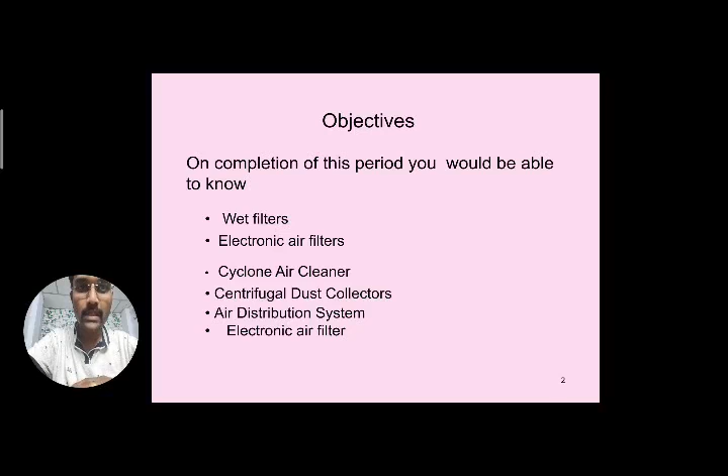Let's move into wet filters now. Here you can observe the diagram of the wet air filter. Just observe it for a moment and you can understand it's very simple. If you know the diagram and how the process happens, you can see this line diagram and understand very easily what is happening in this case.

So let's see what components are there in this wet air filter. Its name itself indicates we are using some liquid or water to make it function as a wet filter.

You can see one side of the passage where the dirty air, containing dust particles, enters, and at the exit you can see the eliminators are provided. Before the air passes onto the cooling coils, the clean air passes over the cooling coils or evaporator coils.

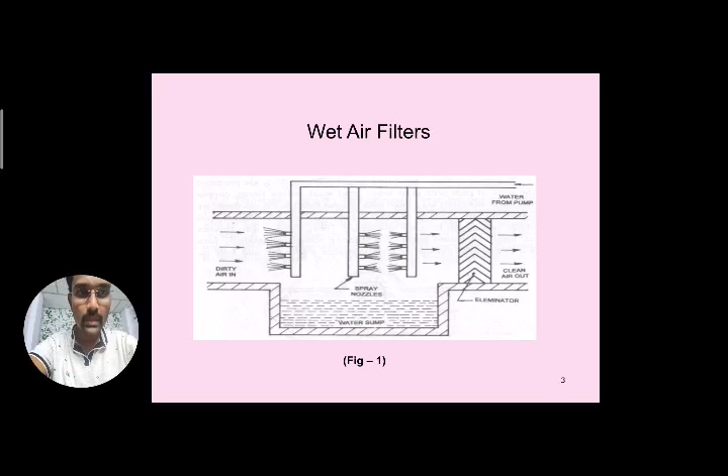Between these two passages, you can see water coming from a pump through different pipelines, connected to spray nozzles where water is sprayed. This makes contact with the dirty air containing dust. The water sump is placed at the bottom, so all the dust along with the water particles collects at the bottom in the water sump. Now let's see a few lines explaining wet air filters.

It absorbs the soluble gases present in air. In the previous cases, dry filters and viscous filters, removal of dust particles and gases present in the air did not happen simultaneously. But in this wet air filter, simultaneous action on both happens - removal of dirt as well as gases present in the air - so both can be eliminated in this wet air filter. Mostly it absorbs the soluble gases present in the air.

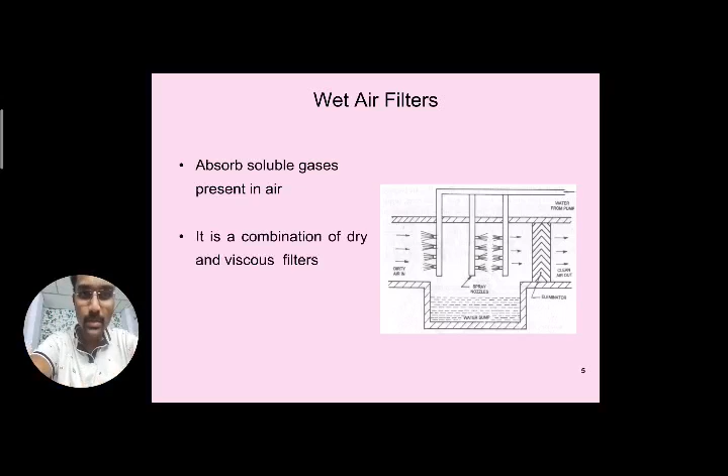As already told, it is a combination of dry and viscous filters, used to remove dust and gases. Both these things can be removed, and these are much more useful than the dry filter and viscous filter, because the combination effect is achieved by these wet air filters.

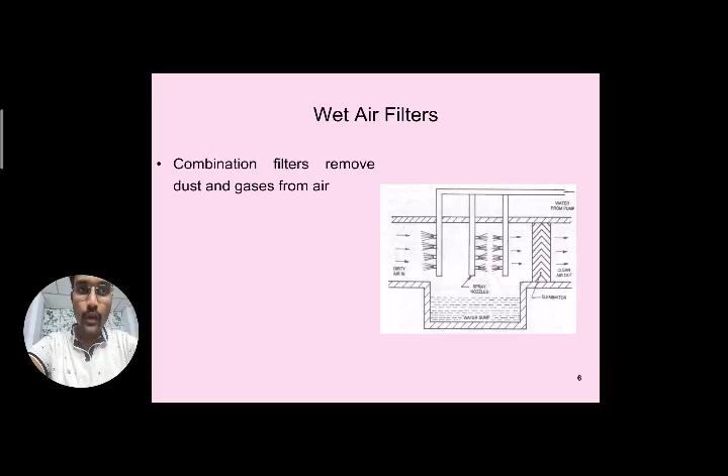The combination filters remove the dust and gases from air. The air is made wet by water spray. As already told, whatever dirt along with the air comes here makes contact with the water, and when the dust particles mix with the water, it gains more weight.

Additional weight is added along with the water and the dust particles. They gain more weight, and they fall down in the water sump, which is provided at the bottom. So due to its additional weight gained by the dust particles along with the water, it will come and fall in the water sump.

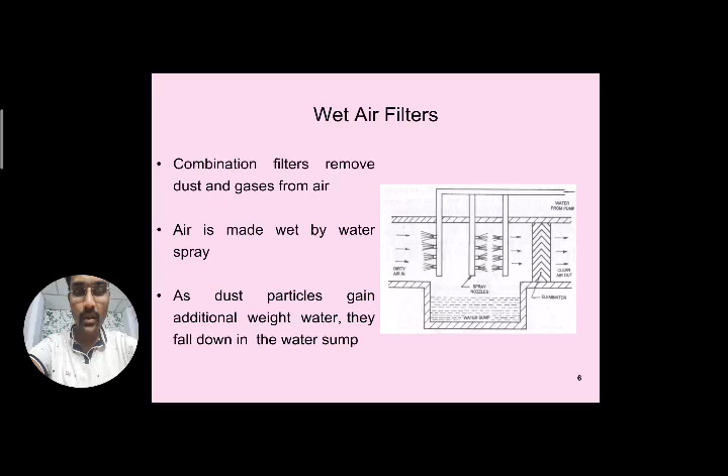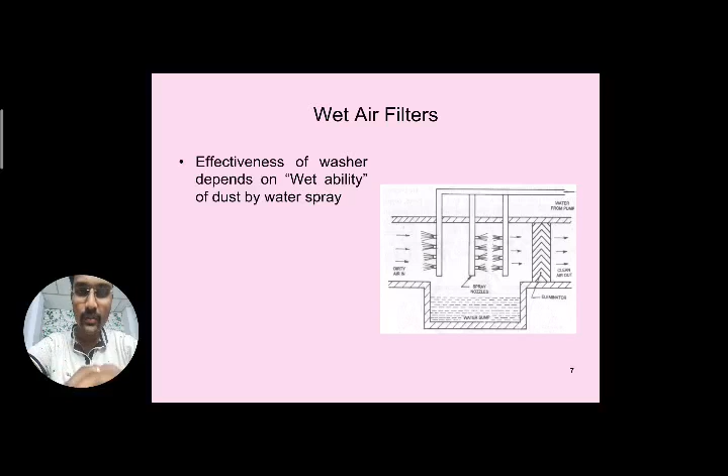The effectiveness of the washer depends on the wet ability of dust by water spray. So here also one criteria: whatever the dust particles coming along with that air, it has to absorb the water, and due to its absorbency, it will readily absorb the water and collect at the bottom. If they are not having the wet ability, it means if they are not absorbing the water content, it is a waste of using these wet air filters.

It may be efficient or may not be efficient for that particular type of dust particle. If they are present in more quantity and not absorbing the wet nature, it is a waste of using these wet air filters. But effectively it will work under all conditions, mostly used in the industrial area where dust, gases or smoke is present. So that is regarding the wet type of air filter.

And there's a more advanced air filter, mostly used in industries where bigger or larger appliances are there. We can use this type of air filter, the electronic air filter, where a lot of the dust particles can be removed by this electronic air filter.

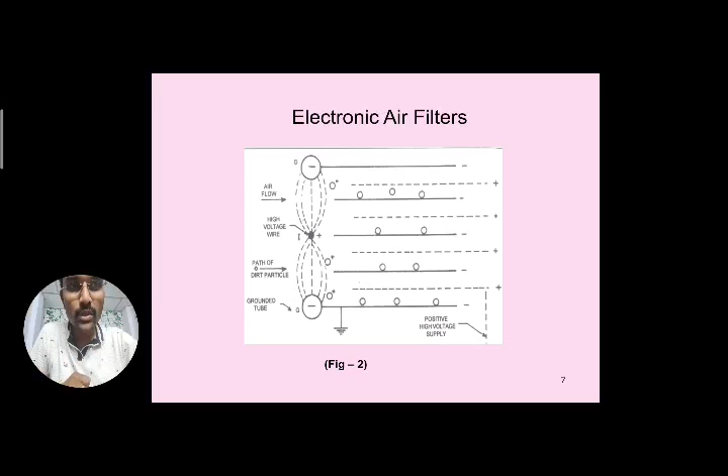So airflow will take place from the left side. Let us observe what is happening in this electronic air filter. It is also known as the electrostatic air filter.

It's called electrostatic because it works on the principle of electrostatics, where the static nature of electricity can be seen in this system. The negatively charged dust particles are readily absorbed by the positively charged plate, since unlike charges attract each other.

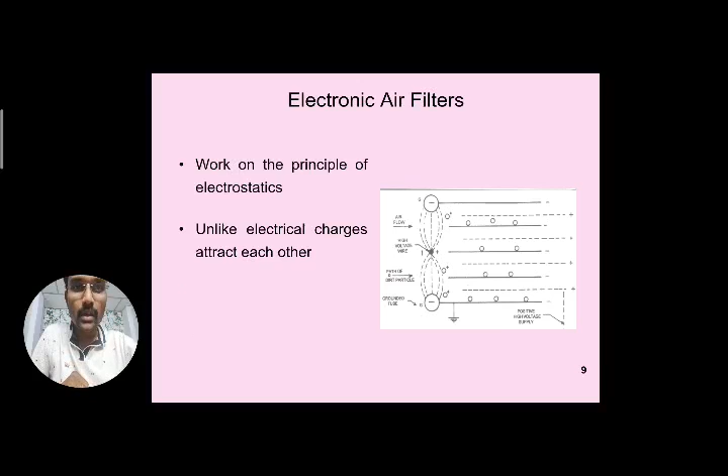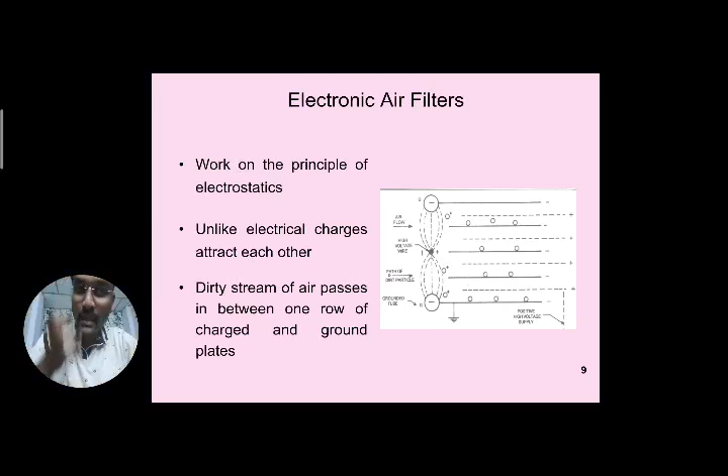Now the dirty stream of air passes in between one row of charged plates and ground plates. So there's a charged row and a ground plate, and whenever the dirty stream of air passes in between them, it will be attracted towards the positively charged plate.

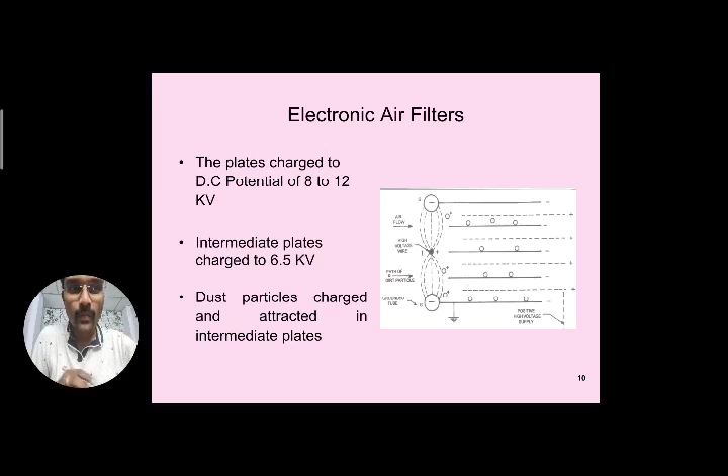Now the plates are charged to a DC potential of 8 to 12 kilovolts. The intermediate plates present in between them are charged to 6.5 kilovolts. So dust particles get charged and are attracted to the intermediate plates, shown here, readily absorbing once charged and attracted to that unlike charged body.

These filters are most efficient in larger installations. The collector plates of the filter are coated with oil to catch dust particles. So besides attracting the charged particles readily to the intermediate plates, they are also provided with oil to catch the dust particles readily. These plates are periodically cleaned due to the attraction and buildup of dust particles after some usage.

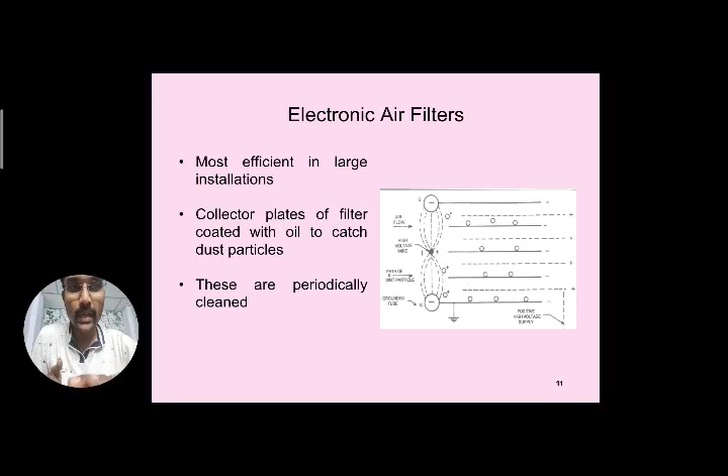A dirt film will form on those plates, so they can be periodically cleaned after usage. So this is regarding the electrostatic air filter, a very important topic. It's also called the electronic air filter, mostly used at industrial sites where bigger appliances are installed.

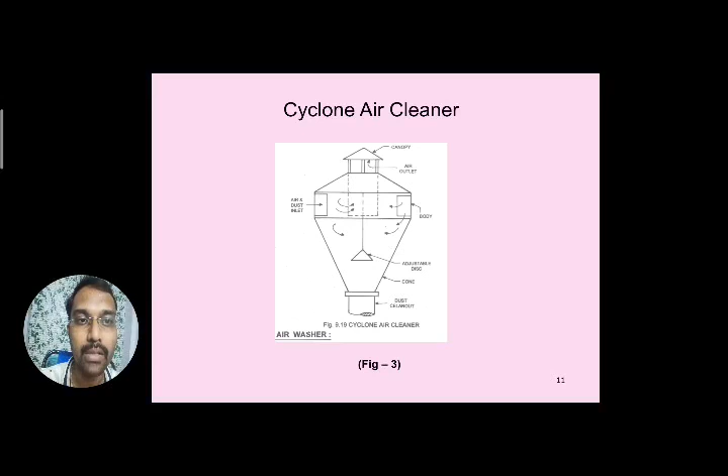You can see some cyclone type movement in this air cleaner, where the air and dust inlet is at the sides, around the complete body. The outlet is at the top - there is a canopy at the top where air outlets are provided, with gaps in between through which the air outlet takes place. At the center you can see an adjustable disc hanging, and a cone type structure, where the dust collected can be cleaned out through the bottom of that section. Let's see a few sentences regarding that.

These type of cyclone air cleaners are also used on the industrial side. It is an industrial air cleaner and removes large particles. Mostly when the requirement is to remove very dirty air, or when the air contains more sand or dust particles, we can employ this type of cyclone air cleaner.

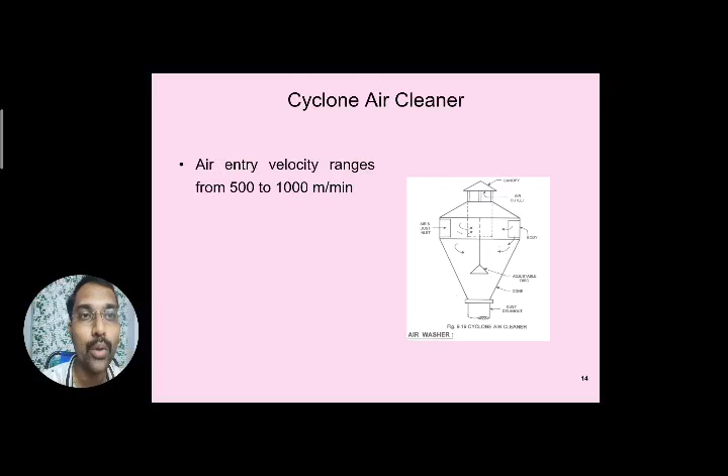Dirty air enters the body tangentially - you can see where it enters at the top, it enters tangentially into that chamber. The air entry velocity generally ranges from 500 to 1000 meters per minute. This is a requirement for employing these cyclone air cleaners - remember this point, the velocity ranges from 500 to 1000 meters per minute.

Due to centrifugal force and the reversal of direction of airflow - that means due to this rotational force and reversal of direction of airflow - as it escapes from the unit, it affects the removal of airborne dry solids.

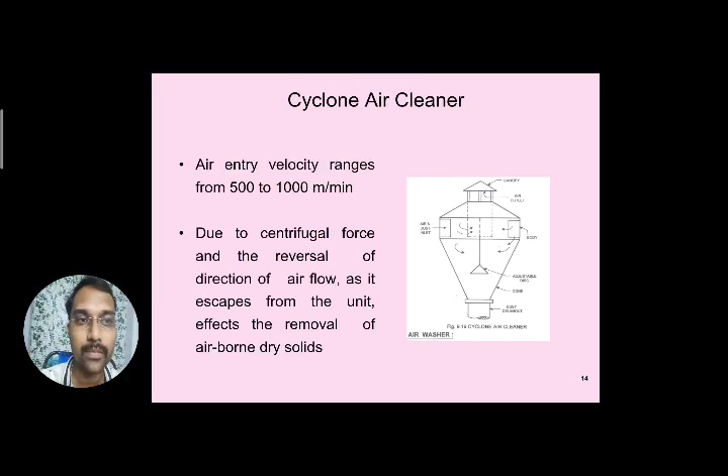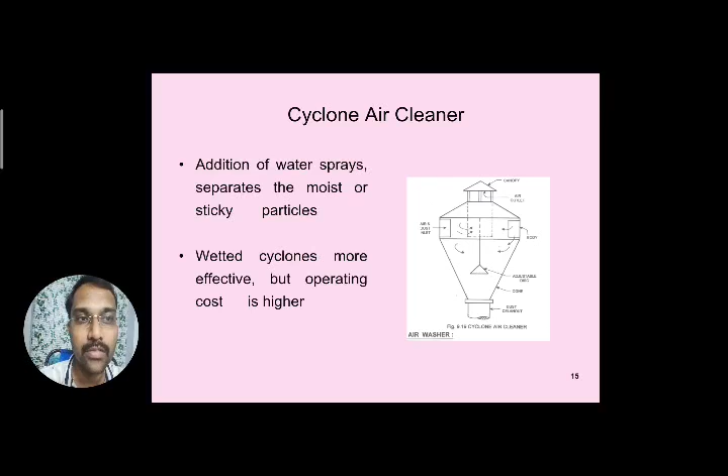Addition of water sprays separates the moisture and sticky particles. To avoid the escaping of dust particles, spray water can be additionally provided here, where it separates the sticky particles and similar contaminants. But wetted cyclones, while more effective, have higher operating costs compared to normal cyclone air cleaners.

So this is regarding the air washer - the next topic. You can see here the two passages where filtering takes place, with eliminators provided. Air inlet and air outlet are provided, and eliminators are provided for additional functioning of that air washer.

Whenever only pure air has to be sent outside, it contains some moisture content due to the addition of water particles. That water has to be removed with the help of these eliminators. At the bottom there is a pump, a heater, and makeup water provided into the tank. Water is sprayed continuously from the top, and due to the contact with air, a process of evaporation may take place at some time.

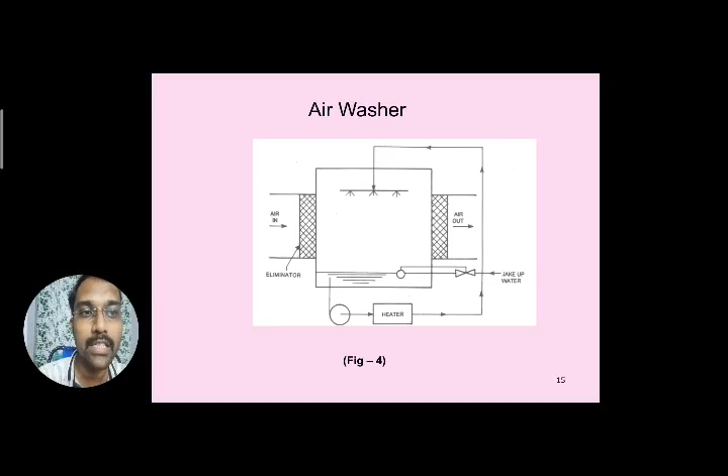Due to that, additional makeup water is added here. And if you observe, this air washer will also be used as an air cleaner. So why are you studying this topic? It serves as an air cleaner, and it acts as a humidifier or dehumidifier based on the condition.

The requirement depends on the season. If humidified air is required, addition of moisture will take place here. You can see a heater is provided, depending on the season condition. Dehumidifier is also placed here.

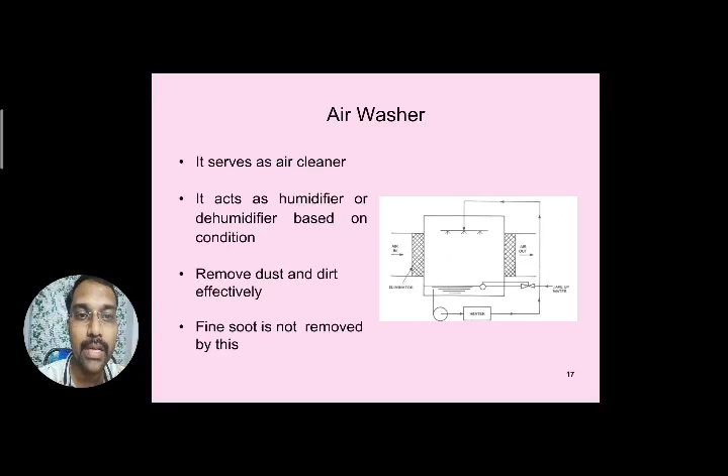It removes dust and dirt particles effectively, because the water particles make contact with them, so the dust particles absorb the water content and fall down due to their heavy weight, and only fresh air can be sent outside through the eliminators. However, in this type of arrangement, very fine micron particles of soot cannot be removed in these air washers. There is a chance of very fine soot particles escaping.

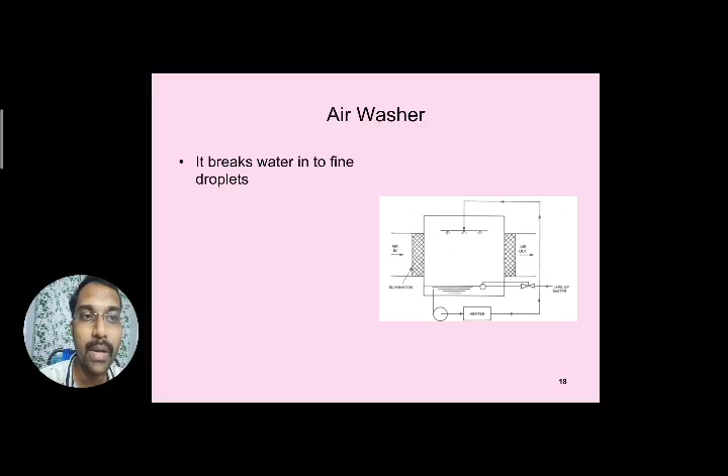What happens here is the spray headers break the water into fine particles, and the combination of wetted surfaces and water discharged from the spray nozzles work together. You can observe there will be wetted surfaces around the wall, and water discharging through the spray headers. Both combinedly act on the dust particles to effectively remove them from the air.

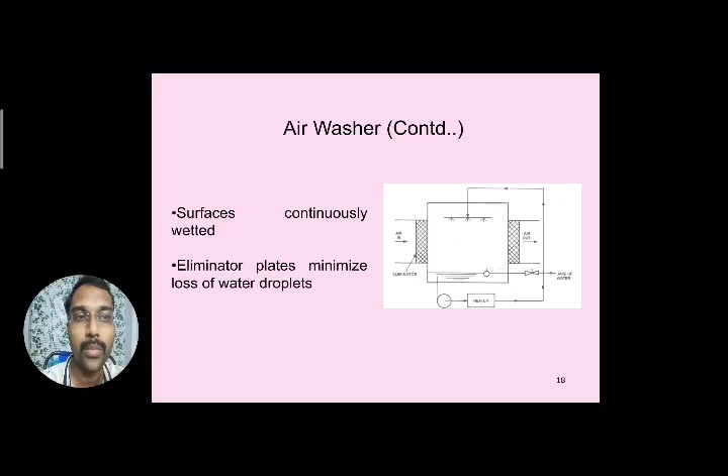The surfaces are continuously wetted here, so whatever passes through also gets continuously wetted. Eliminator plates minimize the loss of water droplets. As I already told you, it contains some water droplets and water vapors, which have to be removed, and only the air has to be sent outside through that passage.

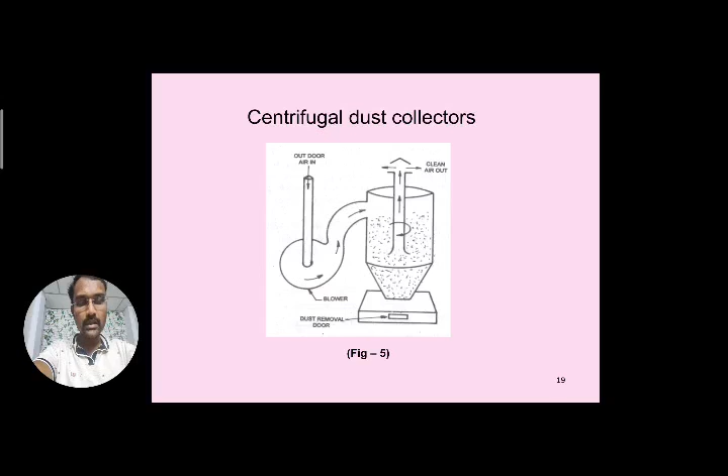Due to the blower, a whirling motion takes place in the conical section, causing it to revolve. Due to that rotation and whirling motion, dust particles collect at the sides of the dust collector. Only the fresh or clean air passes through the tubes and is sent through other passages, and dust removal takes place at the bottom portion.

We'll see a few lines regarding this centrifugal dust collector. They are most popular in industrial applications and effectively remove large dust particles.

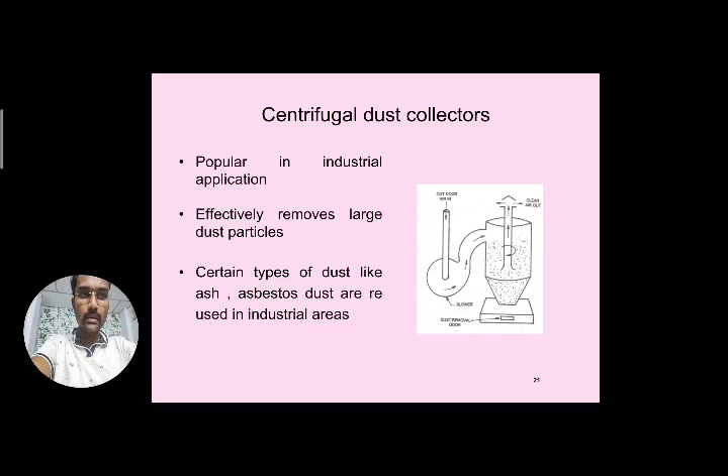If you want to remove large dust particles at industry sites, centrifugal dust collectors may be the most popularly used. Certain types of dust, like ash or asbestos dust reused in industrial areas, can also be removed in these centrifugal dust collectors. So they are used in industrial applications.

So explaining this, the air stream passes into the conical chamber. You can see there is a pipeline where outdoor air from the atmosphere enters into this conical chamber by blower.

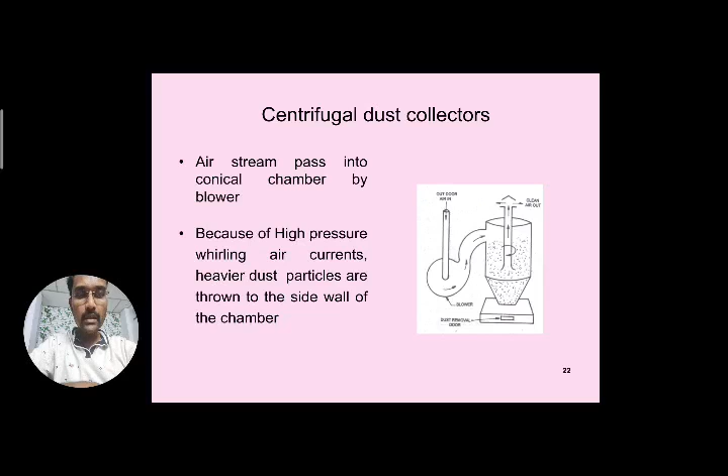First, air enters with the help of a blower and is sent to the conical chamber. Because of the high pressure whirling air currents created by the blower, heavier dust particles are thrown to the sides of the chamber.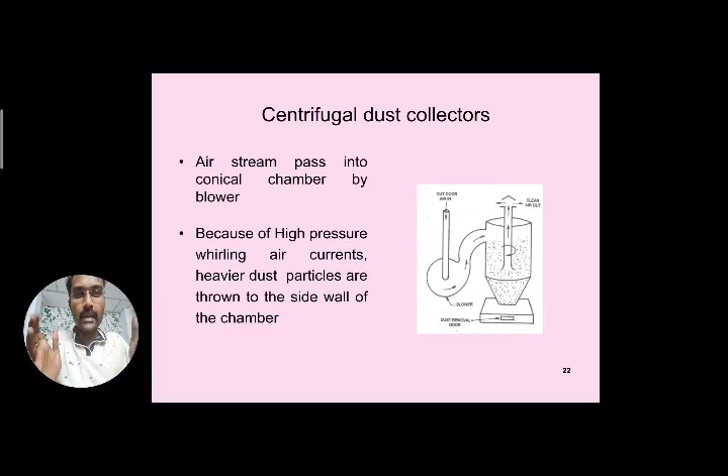Heavy particles settle at the sides of the wall of the chamber. This is how it is done in the centrifugal dust collector. The dust collects at the bottom of the cleaner, while the clean and dust-free air goes out from the top of the cleaner.

The dust is collected at the bottom of the cleaner after settling down, after losing its whirling motion. The clean, dust-free air moves through the center toward the top, and is again used as clean air, which is sent further to the cooling coil or evaporator coil.

However, it is not able to remove minute dust particles. It can only remove very large particles like ash or some asbestos particles. The very minute particles present cannot be removed in this centrifugal dust collector.

However it may be, it is doing its function and may be used in industrial applications for a very effective purpose. To operate the blower and create that much high pressure, and to remove very large dust particles, it requires a very large amount of power. The cost of the equipment may also increase, but they may still be used in these industrial applications.

So this is regarding the centrifugal dust collector. Next, moving on to the next topic. Hope you have understood these air cleaners and dust collectors. The next topic is regarding the air distribution system.

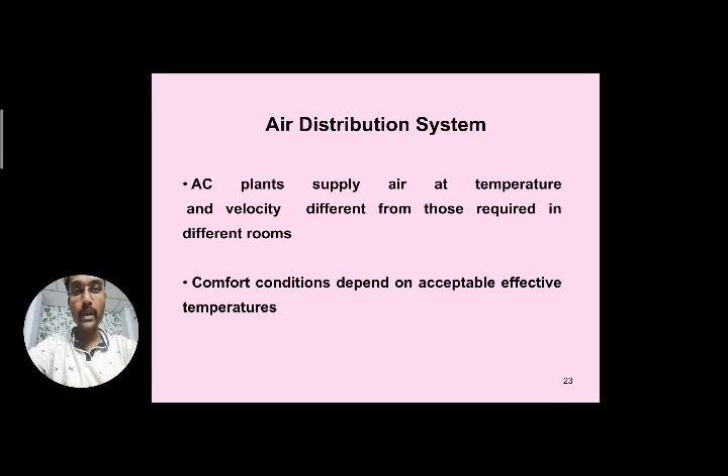As we have seen, the effective temperature depends on different factors like dry bulb temperature, wet bulb temperature, and relative humidity. Depending on all these conditions, the comfort conditions will depend.

Next, good air distribution is also one main factor, which is achieved by the proper temperature, humidity, and air motion in the conditioned space. All these factors will additionally support good air distribution.

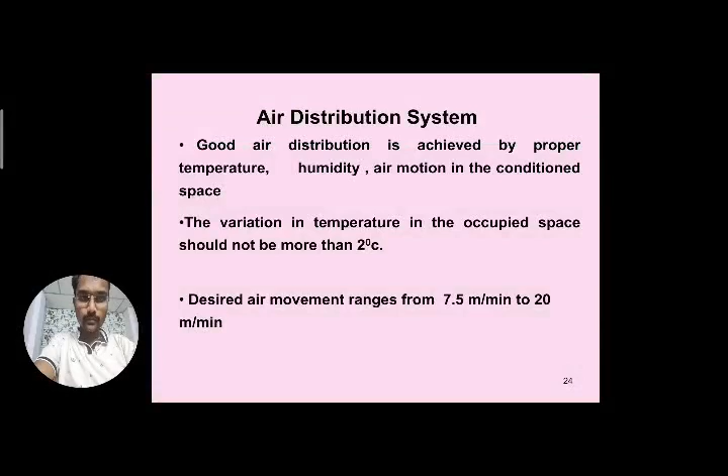The variation in temperature in the occupied space should not be more than 2 degrees centigrade. If the air distribution is uneven, there may be changes in temperature which affect the change in temperature. The desired air movement ranges from 7.5 meters per minute to 20 meters per minute.

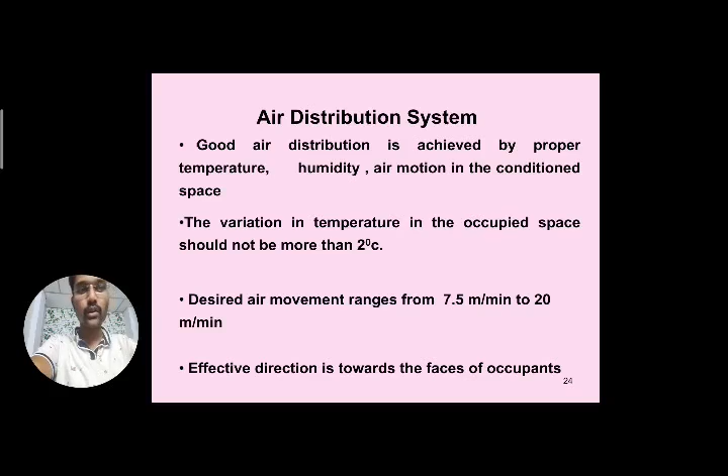The effective direction is towards the faces of the occupants. Mostly, wherever the occupants' faces are, the direction may be that way. Whatever the sitting direction is, the occupants' face direction should be the effective direction where the air distribution has to take place.

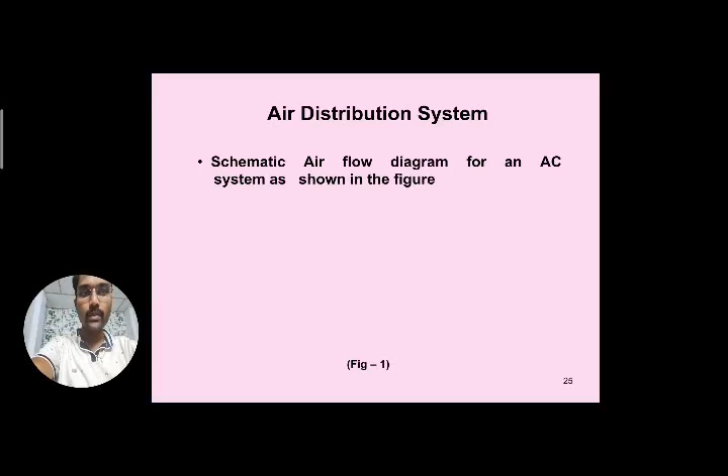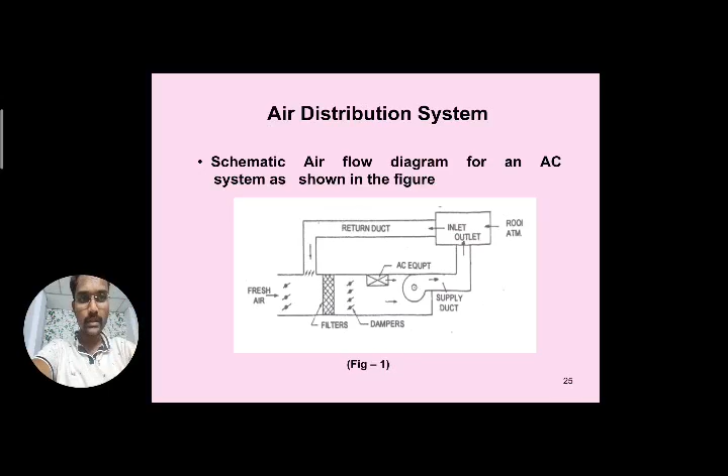Next, the downward airflow is better than the upward airflow. The mostly chosen and more comfortable option is when the airflow coming into the conditioned space is a downward airflow, which is much better than upward airflow.

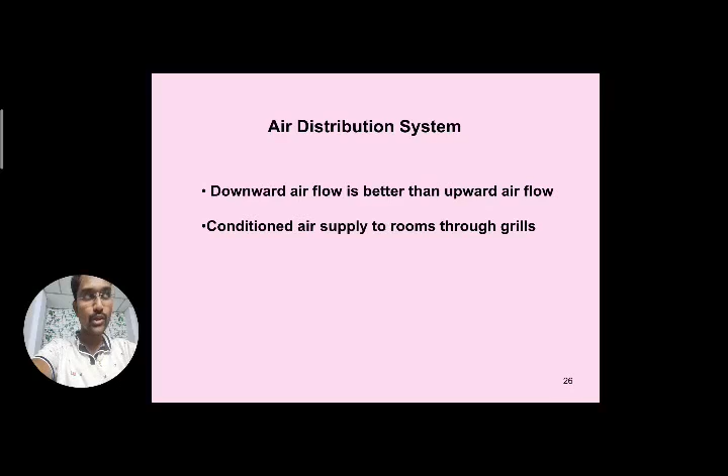Now what about the conditioned air? It's supplied to the rooms through grills. So grills are provided, and from that the conditioned air is supplied to the rooms.

Coming to the classification of air distribution systems: several methods of air distribution systems are used for different purposes. Different air distribution systems are utilized here, and we will see some of them. Just to list them out, the main three are the ejector system, the downward system, and the upward system.

In today's class we will learn regarding the ejector type of air distribution system. We will see its subtypes and discuss what the ejector air distribution system is, starting from the ejector system itself.

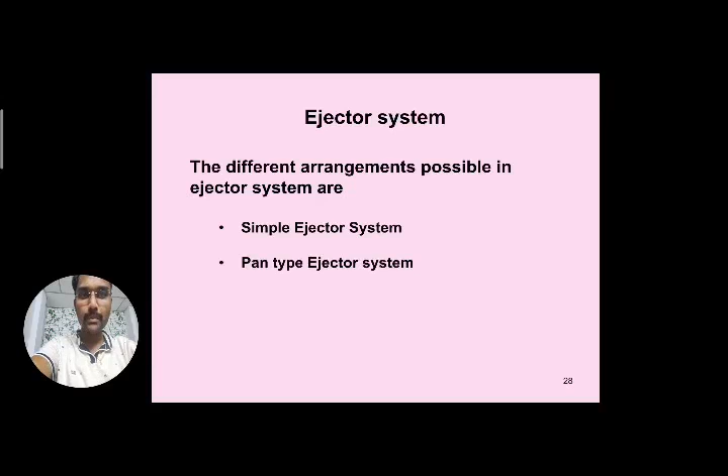In the ejector system, different arrangements can be made. One is a simple ejector system, pan type ejector system, combined pan ejector for supply of return air, and comfort draft system. These are the four different arrangements of the ejector system.

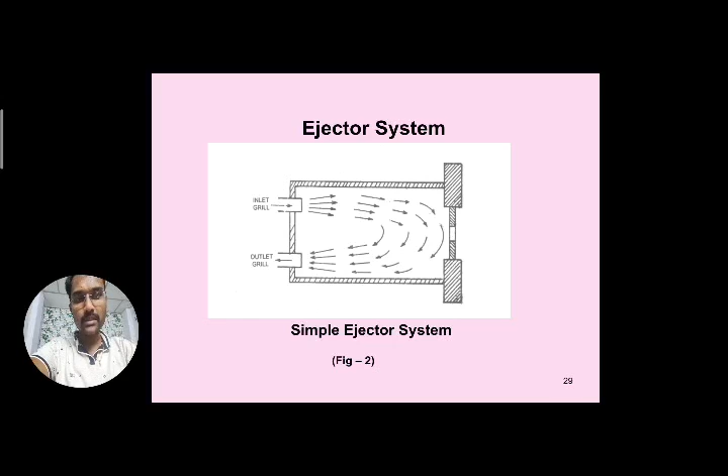Air is entering, and the return air has to go through the outlet grills, then enter into the return ducts. On the same wall, grill attachments are provided - inlet and outlet grills. The air is conditioned, passed or ejected into the conditioned space, then sent back by changing its direction to the outlet grill.

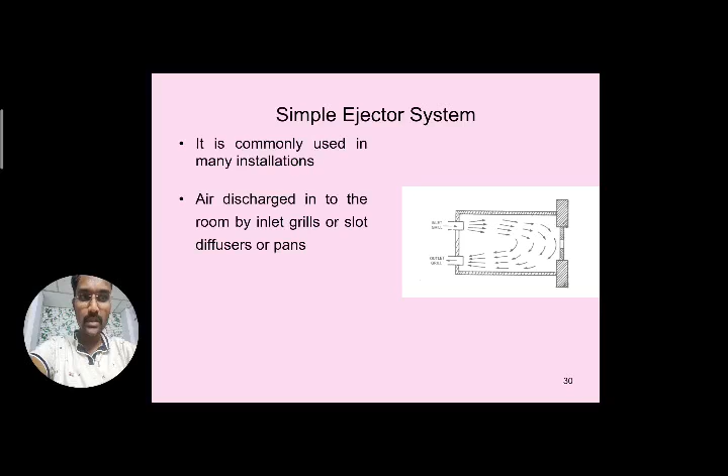Let us see some points regarding that. The simple ejector system is commonly used in many installations. Air is discharged into the room by inlet grills, slot diffusers, or pans, which are provided at the entry of the wall. It is cheap and simple in construction.

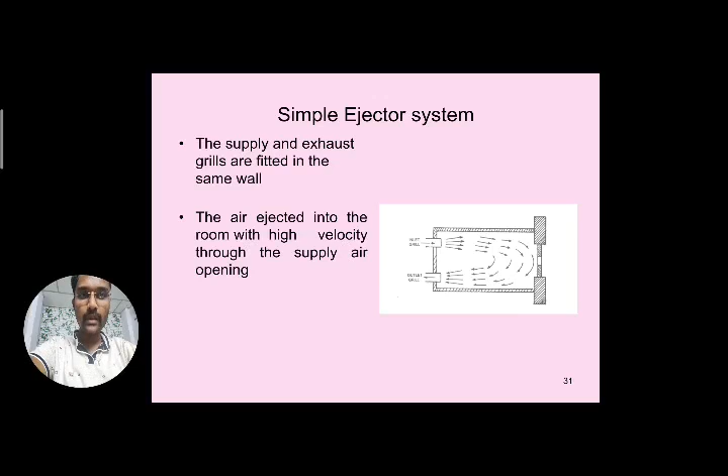The supply and exhaust grills are fitted in the same wall, and the air is ejected into the room with high velocity through the supply air opening - that is the supply air opening into the room.

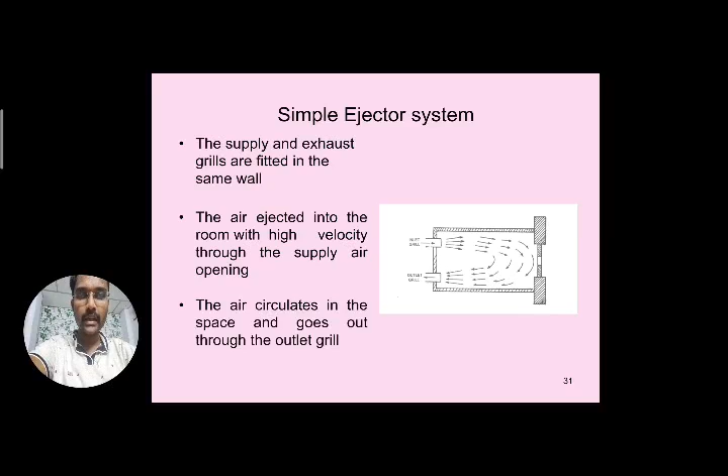The air circulates in the space, and the circulated or used air goes out through the outlet grill provided, so that will enter back. Very simple in design. Now looking at the second type - the pan type structure, this is the plate pan type ejector system.

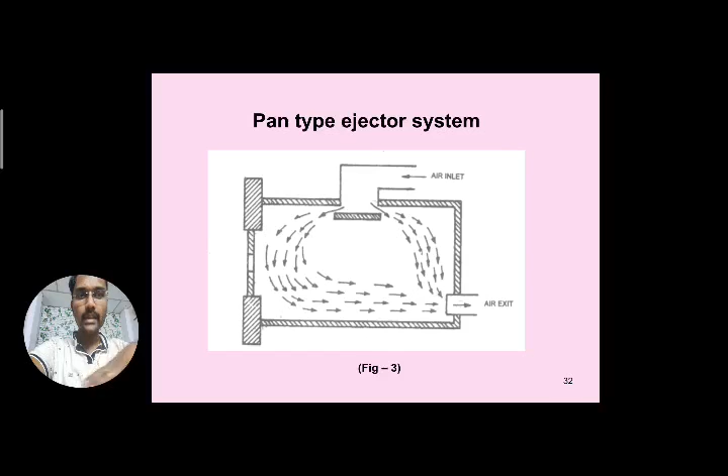It is relatively better for uniform distribution of air compared with the previous simple ejector system. So it is somewhat better for uniformly distributing air within the room. It is an improved method of air circulation. You can see this in the diagram.

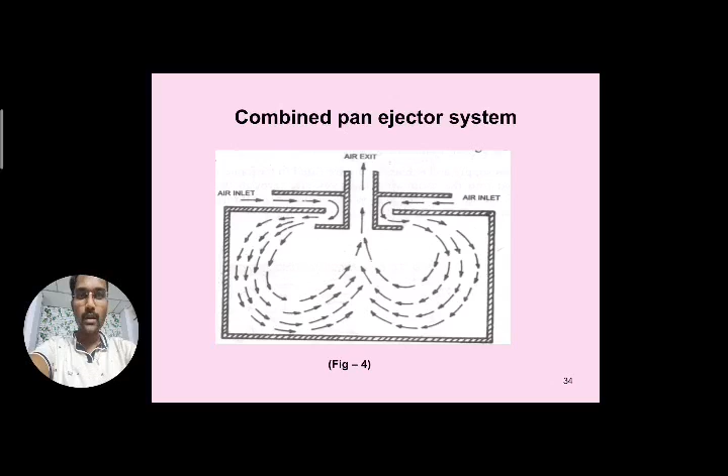Next, for the same pan ejector system, there is an advanced type. It is a combined system where air inlet takes place, giving complete distribution throughout the room uniformly. This is an advancement of the pan ejector system. You can observe the diagram here.

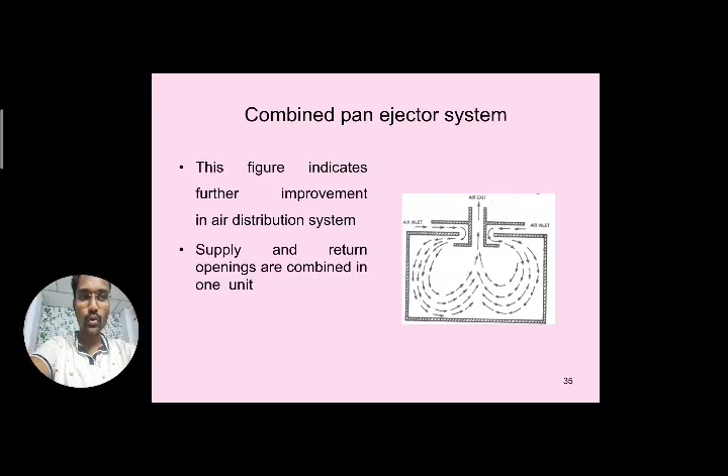Further improvement in the air distribution system is taking place in this combined pan ejector system. The supply and return openings are combined in one unit. Supply air exits at the center, moving upwards, and inlets take place at the two sides combinedly. So it makes contact throughout the room, and air exits again from the top. In one unit, you can see both the inlet and outlet systems.

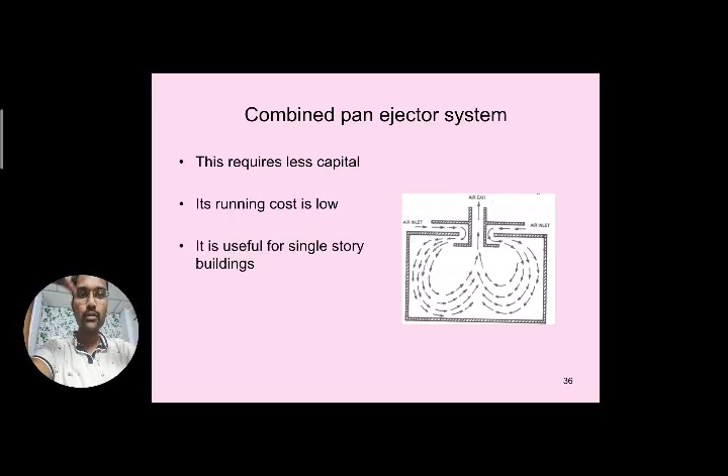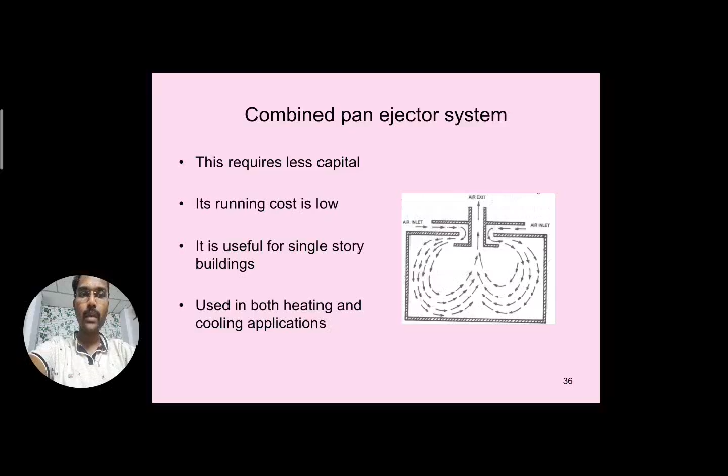This requires less capital, meaning investment is very low for this combined pan ejector system. The running cost is also very low. It is used for single story buildings, where it is very best suited. This combined pan ejector system is used for both HVAC - heating, ventilation, and air conditioning. So this type of combined pan ejector system is used. This is the third system.

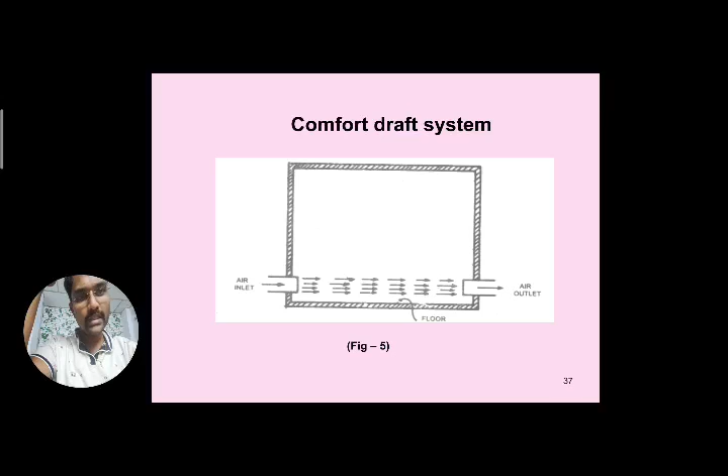Moving to the next system, the comfort draft system, which is very simple in design. At the bottom level of the floor, the air inlet and air outlet are placed at the same level, up to a height of about 2 to 2.5 or 3 meters from the floor level, where these passages are provided for air inlet and air outlet.

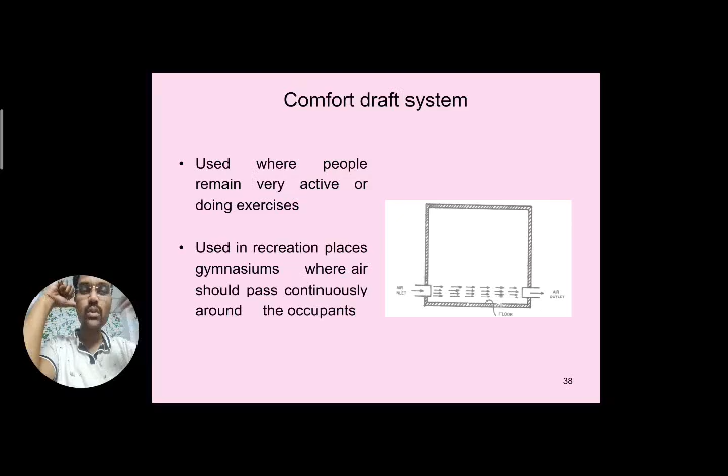This type of air distribution is mostly used where applicable, such as in gyms or places where men are working very hard. In that particular room, this type of air distribution is required, done with the help of this comfort draft system. It may be used in recreation places like gymnasiums, or where air should pass continuously around the occupants.

This gives better performance for the participants and removes vapors and odors produced by them. It is best suited as air moves continuously in the room at the same height. Air inlet and exit take place such that it removes the vapor on our body - sweat or odor - which is produced by ourselves. This is removed continuously with the help of the comfort draft system.

Air is distributed only in the occupied zone, used in the same direction, limited up to a height of 2 to 2.5 meters from the floor level. It is best suited for a particular purpose, mainly in gymnastics or gyms. So this comfort draft system is mostly used.

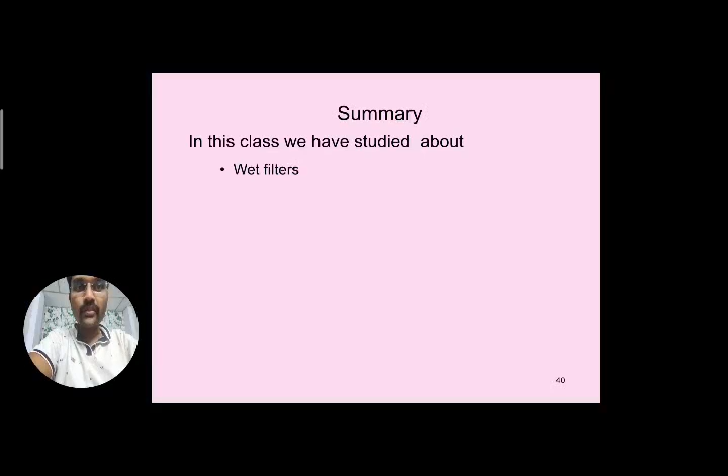In this class we have studied the continuation of air filters. In the previous class we saw two types of air filters - dry filters and viscous air filters. Continuing in today's class, we have seen wet filters, electronic or electrostatic filters, the cyclone air filter or cyclone air cleaner, air washers, and centrifugal dust collectors. So we have mostly seen the air filters, and also the air distribution systems, in which the most important are the ejector type distribution systems.

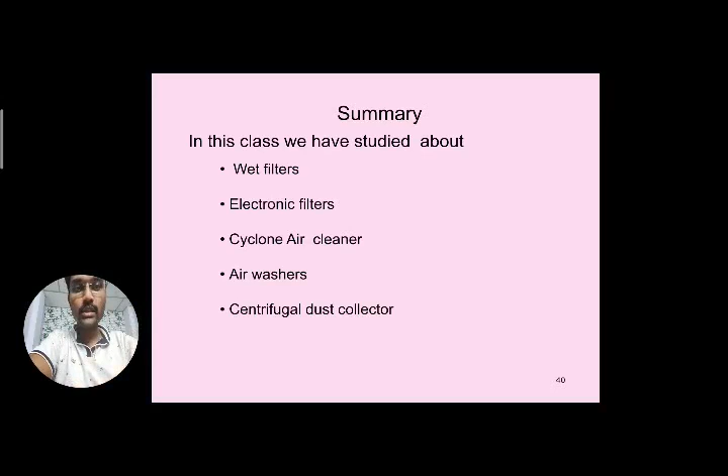Different air distribution systems, different ejector systems also we have seen. So a number of topics are covered in today's video session. Next we focus on some quiz questions. Hope from this video class you can understand and answer these questions. If you can answer them, you have followed the video session perfectly.

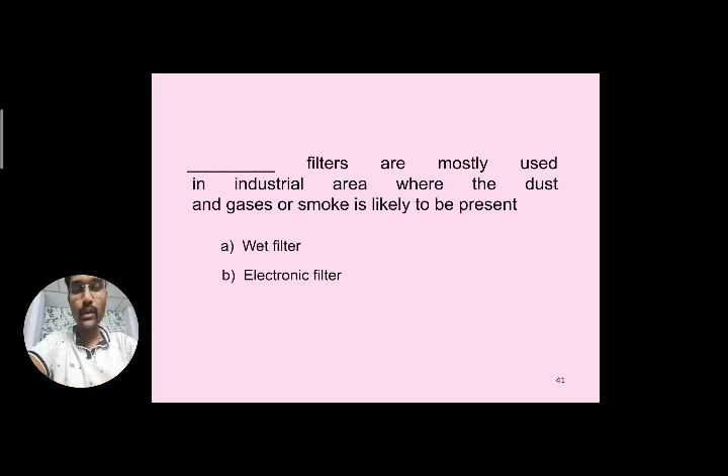The question is: dust filters are mostly used in industrial areas where dust and gas or smoke are likely to be present. What type of filters are required? Options are wet filters, electronic air filters, electrostatic filters, cyclone air cleaners, or all of the above. As already told at the start of the class, wet filters can remove both gases and dust simultaneously, so they are mostly used in industrial areas. Wet filters are very effective.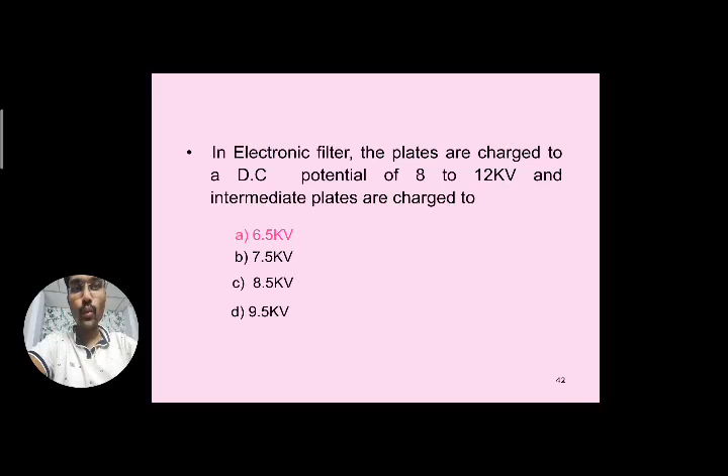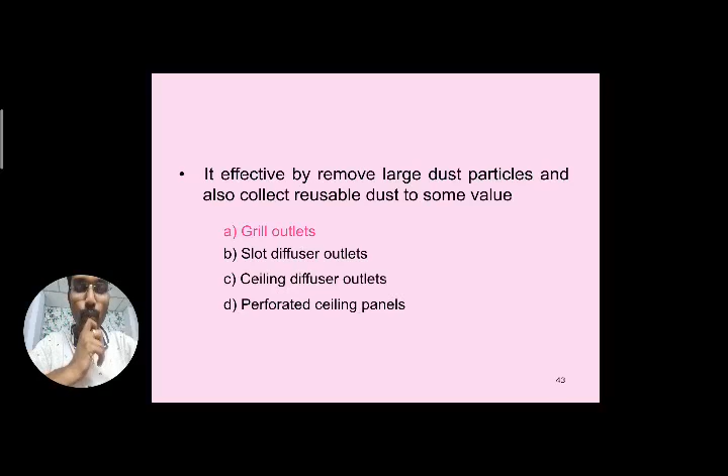Next question: which is effective in removing large dust particles and also collecting reusable dust to some value? Options are grill outlets, slot diffuser outlets, ceiling diffuser outlets, and perforated ceiling panels. The answer is grill type outlets, as they are effective in removing large dust particles and collecting reusable dust.

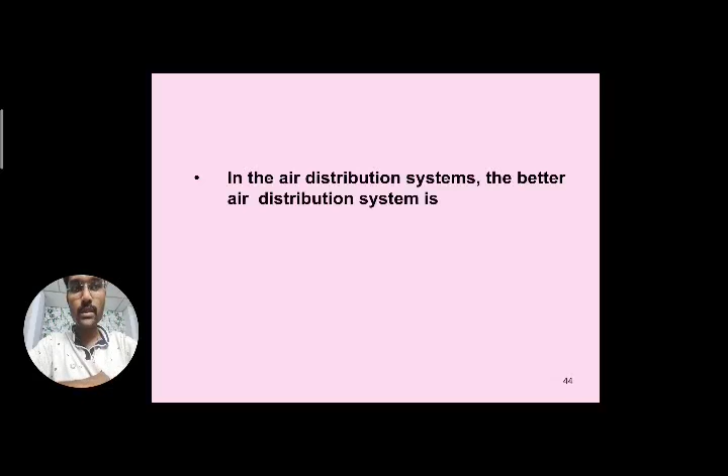In air distribution systems, which is the better system - ejector, downward system, upward system, or all of the above? As already seen, the downward system is very effective compared with the ejector or upward air distribution systems.

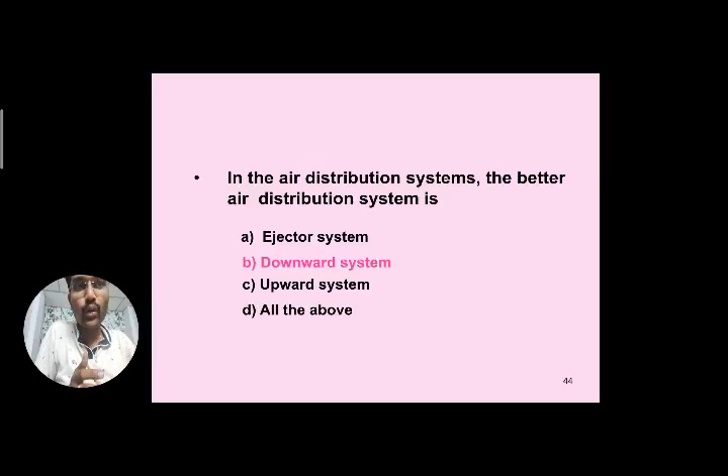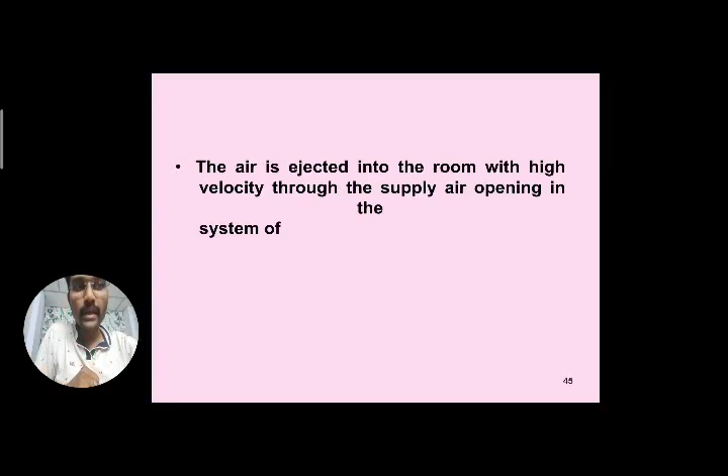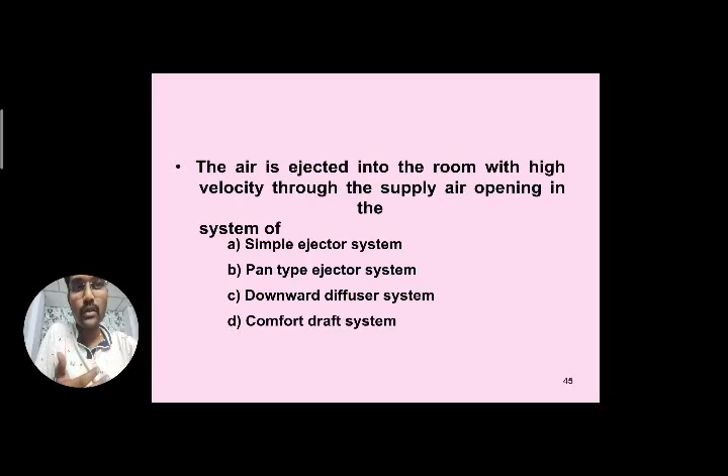Next question: air is ejected into the room with high velocity through the supply air opening - is this the simple ejector system, pan type system, downward diffuser system, or comfort draft system? This means high velocity through the supply air opening, so the answer is the simple ejector system. In high velocity air distribution systems, the most effective and most used one is the simple ejector system.

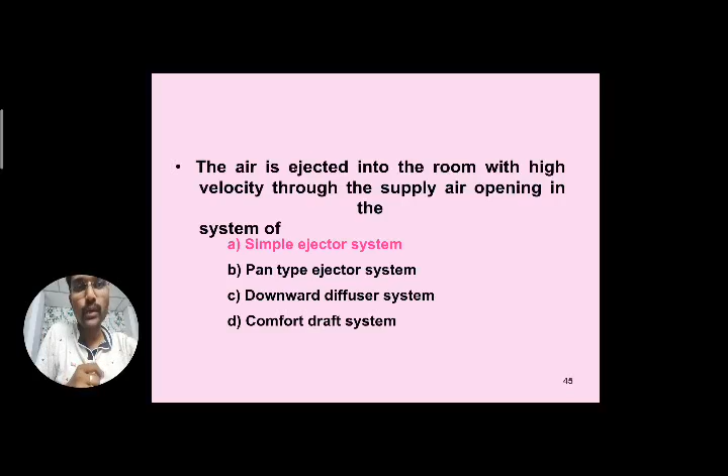This is the end of the quiz part. Hope you can answer all of these questions. Next, the frequently asked questions which may be asked in examinations - we'll see them one by one.

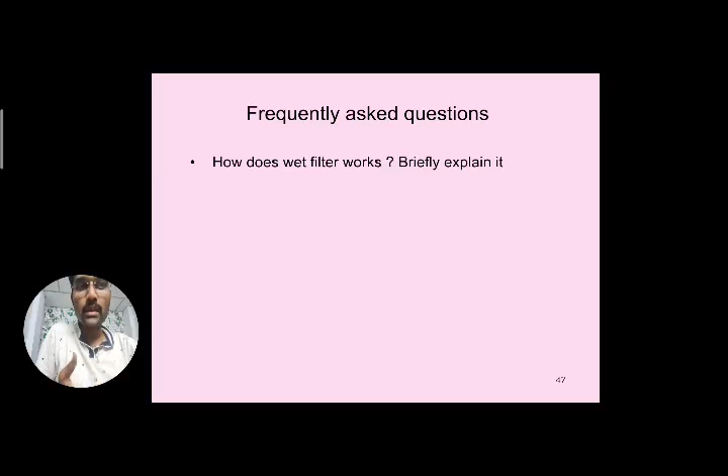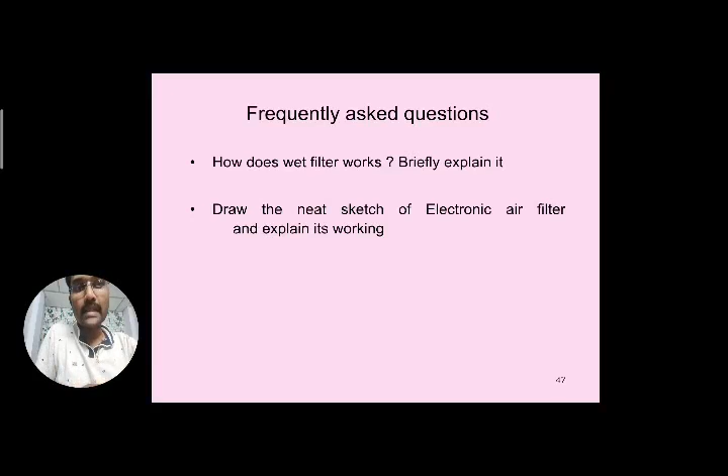First, the question based on the wet filter: how does the wet filter work? Briefly explain it. Next, the second question regarding the electrostatic air filter, which is very important: draw a neat sketch of the electrostatic or electronic air filter and explain its working.

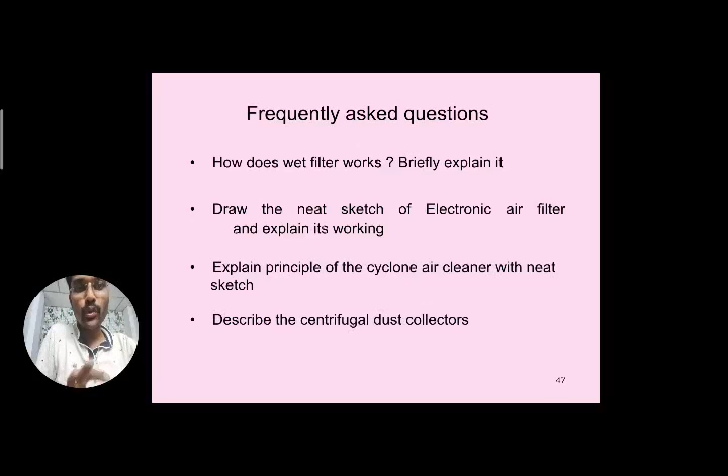Next, cyclone air cleaner, also very important: explain the principle of the cyclone air cleaner with a neat sketch. Also very important: describe the centrifugal dust collectors. Out of these four, at every time they may ask questions regarding these air filters - all four are very important and frequently asked.

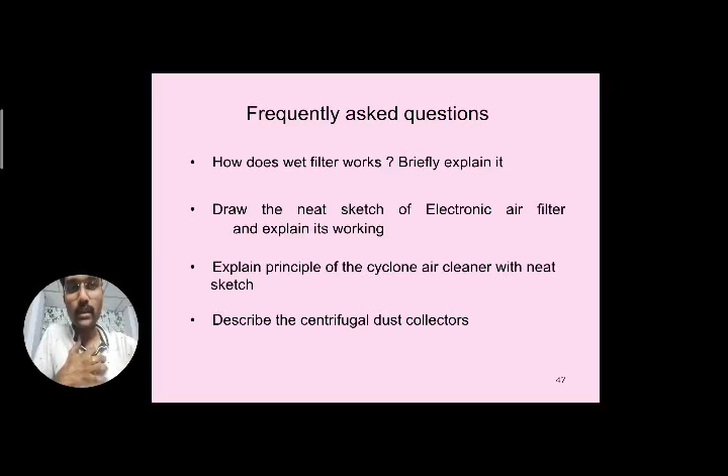Next, continuing with the air distribution system: what is an air distribution system, classify it, and why are you using the air distribution system, as we have seen in the theory part. This is one question. We have also seen the classification, like ejector, downward system, upward system, and so on.

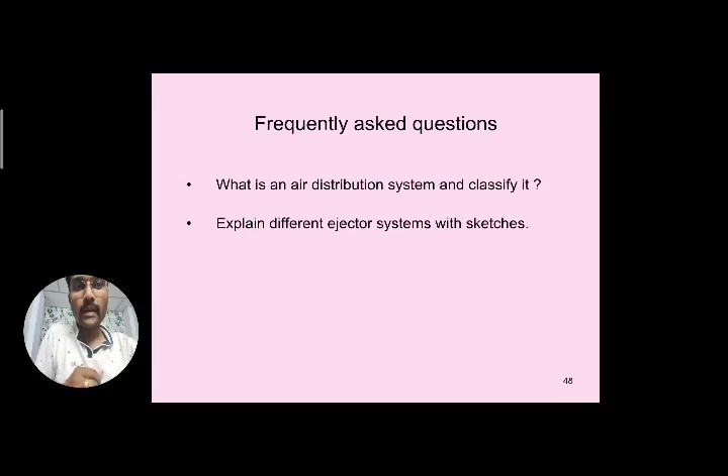The next important question regarding the ejector system is: explain different ejector systems with a neat sketch. This is also one question. So this is regarding today's video session - a lot of topics we have discussed, the additional equipment of the air conditioner.